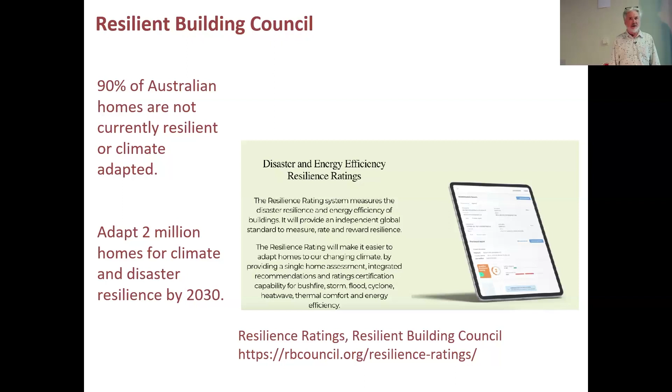So resilient homes can reduce inconvenience. That's the first step. Oh, there's a blackout. Oh, my fridge is still running. Isn't that nice? That's more than just nice. It means your food's not going off. So that's reducing wastage, and that's a sustainability plus. They also save money in the long term, and to an increasing, though still small, trend, reducing insurance premiums.

There is yet more work to be done to enable insurers to understand what a resilient home is, so that they will say, okay, we will reduce your premium because you're much less likely to be damaged by whatever event you're preparing your resilience against. It also means the home is more versatile in the long term and you can recover more quickly from extreme events.

So resilience is more than just surviving the extremes. It's taking them in our stride.

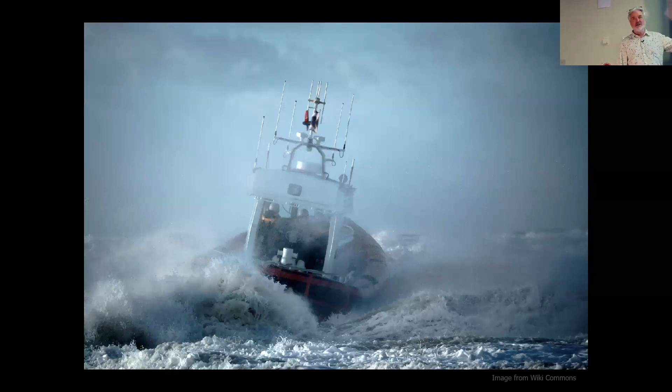I'd beach it ashore and I'd be eating the fish and chips and having a wonderful time. But the reality is that my boat would struggle in conditions like this, which happen regularly in the Tasman. It would need to actually be resilient enough to cope with that, and this would overcome it completely.

So life isn't always like this. We need to be able to cope with that. So when we're dealing with our houses, we have to make them healthy and comfortable. They have to be durable, and durable without lots of maintenance input. So that's one of the key things as well.

Because I don't know anybody who enjoys doing maintenance on their houses - maybe they're out there somewhere, I don't know. They need to be energy efficient, because that reduces the demand on your energy side.

Use low embodied carbon - it's not such a direct input into the resilience, but it's just a really good thing to do. And therefore, they need to draw on passive design elements to get that kind of ability to take things in their stride. Affordable utilities and bills, because part of resilience is that you might find external forces...

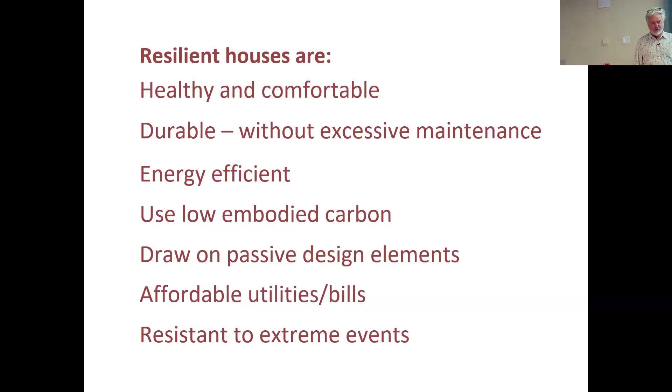Raise bills for whatever reason significantly, coincide with perhaps your inability to pay for them because your income might be hit by some event or other. So the better you can look after your income, that's great - that can be out of your control. But if you can bring your utility bills down, that increases your economic resilience and resilience to extreme events.

Obviously, so what are they? Heat waves, cold snaps, bushfires, floods, power outages, and mains water outages. If we were in other parts of the world, on that list I would have to put earthquakes. But at least in this part of Australia, earthquakes are very infrequent, and they're usually very mild when they happen.

So what can we do to actually respond to some of those things? Building design and specification obviously has a big impact on our response to heat waves and cold snaps, likewise to bushfires and floods. But floods are also affected by town planning. So if you're building in a floodplain, should we be building in a floodplain, I guess is the question we need to ask.

So there are some things there that are outside of our control. If you're already living in a floodplain, then there are things we definitely need to do that elevate that aspect of resilience dramatically. And then mains water and power outages, that's about building systems and how we set those up.

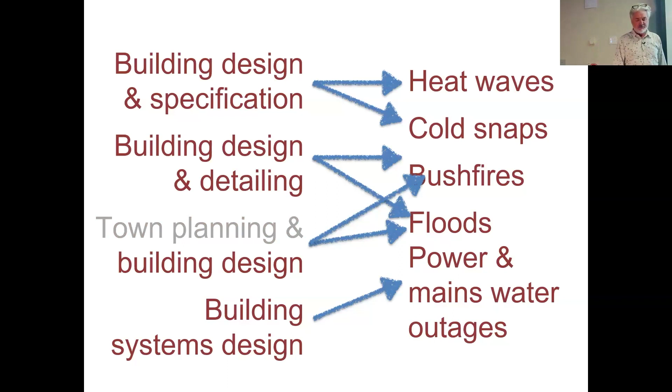So the one thing that we probably can't talk about and do anything about is the town planning issue right here and now. We can certainly support governments that say don't build on floodplains, but let's move on to what we can talk about. So in terms of retrofitting passive design - yes, you can retrofit passive design to uplift whatever potential a building has.

If it's a new build, obviously a blank sheet of paper, there's no excuse for not getting it absolutely right. But we can always do things to existing buildings to improve their thermal comfort.

Active design, so that's about your appliances and energy systems and so on in the autonomous systems. And we have, at Renew, we've been working on the Getting Off Gas Toolkit, which is incredibly useful and needs to get out there into the wider world big time.

So let's have a look at these extreme events and what we can do about them. Heat waves and cold snaps, I'm going to run them together because whatever you do generally to improve the thermal comfort of your building and the thermal performance will work if it's done with passive design principles. It will work for both.

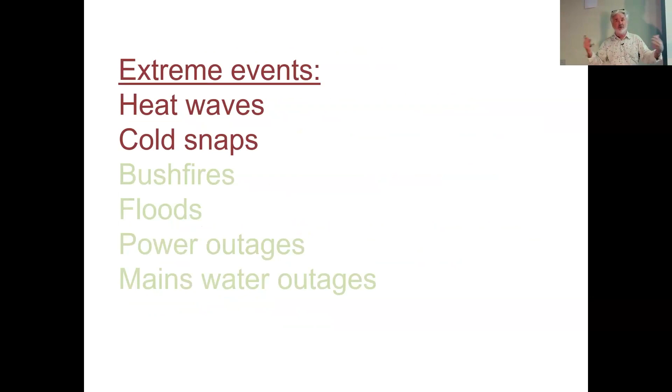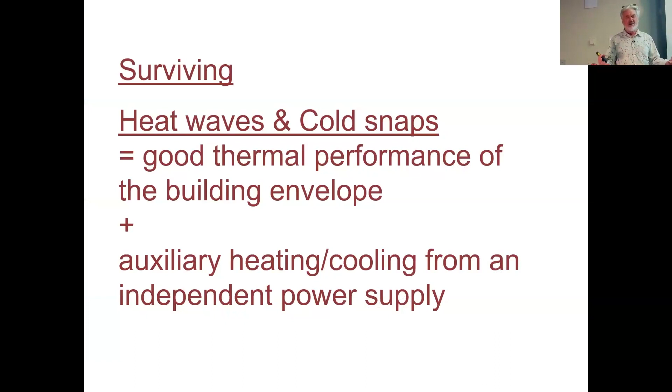So surviving heat waves and cold snaps, it's good thermal performance of the building envelope plus some auxiliary heating and cooling systems that have an independent power supply.

So if we're looking at thermal performance, passive design, look, I'm semi-retired, I don't like that word, I'm a building designer who's had a change of job description because now Renew keeps me and Graham really, really busy, so a little bit of work, a lot of Renew, it's all a big party, we love it.

However, I'm not an educator, okay? Yes, I've done a lot of training with the industry, but I'm not a trained educator. People who are tell me that if you want people to remember something, give them 5 points because there's 5 fingers. Now, that seems a bit simplistic to me, but I'll take their word for it.

The problem is that passive design doesn't properly fit into 5. I know there are people who theorise it this way, but I don't agree. So we need to basically grow a 6th finger, if you like, to help us remember.

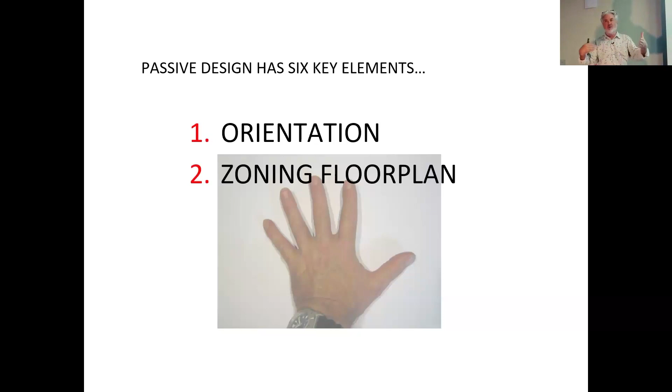So first one is orientation. Which way does the building face? That's all about the topography and your locality and so on. Number 2 is about zoning of the floor plan, not the zoning the building sits in terms of council zoning, but being able to zone off or control areas within the building. So it's not just open plan gone mad.

Third one is thermal mass, so that's just a kind of a battery for warmth and coolth. Fourth one is shading, self-evident. Fifth one is insulation, and that is the whole building envelope, floor, walls, windows, roof, the lot. And then the 6th one is ventilation, the ability of the building to provide fresh air, but also breathe out when things are really hot.

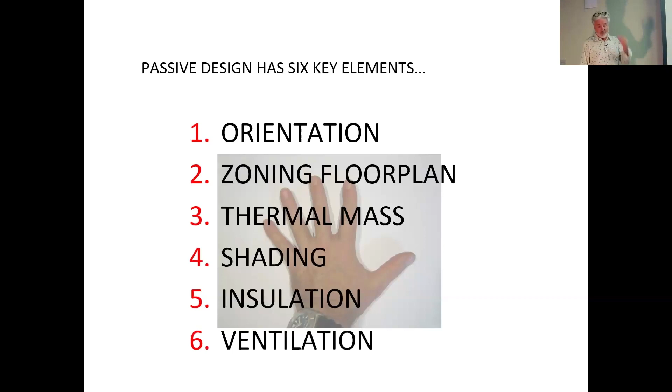And that's fine. It's basically got 2 main functions, and there's a couple of extra fingers there, and you'll see why in a minute. But passive heating by solar energy is the obvious thing for winter, and then passive cooling comes from excluding the solar gain. So bring the sun in winter, keep it out in summer with those other aspects together, and you can make it work. But it's always occurred to me that...

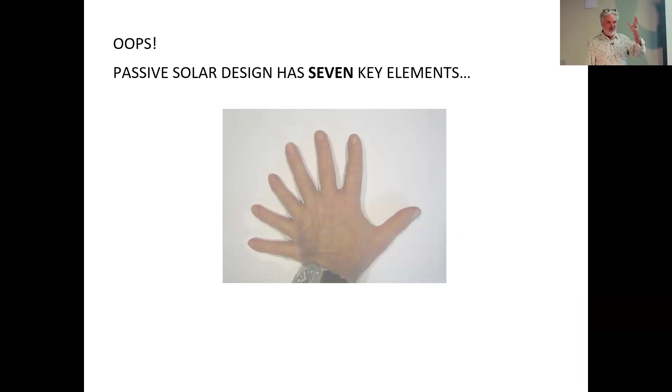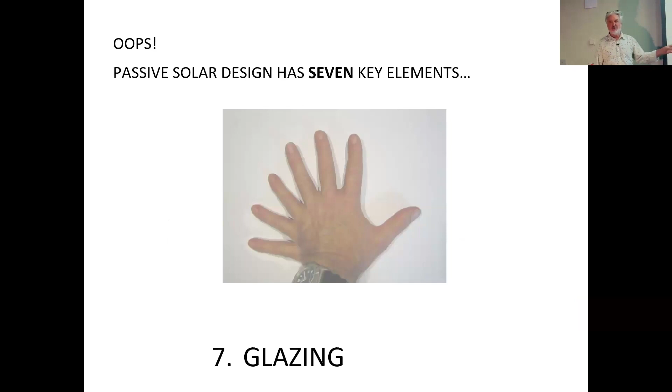There's something missing. And if you use the 6 key element theory, that's glazing. Now, it's a little bit different in character to the others in that it is a kind of specific building element, whereas the others are kind of more design principles. But when you put it with the others, you can see that with the exception of zoning of the floor plan, there is a direct relationship between the glazing and how each one of those other things works.

So the orientation, where's north? If you don't have glazing on the north, it doesn't matter, you've wasted your time. Insulation, glazing forms part of the necessary insulation barrier to get control of heat flows, etc.

So we'll go through these in detail. Now, I've put a lot of low-grade technical slides. They're not scary technical, but they're not just words and pictures, a lot of diagrams into this presentation. I'm not going to talk to every one of them because we will be here all night, but they're all in a PDF and it will be available for download on the way through.

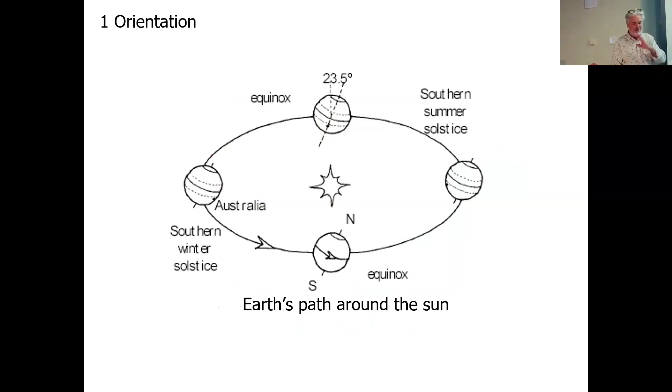So fundamentally, you know, orientation, we know that the Earth has a tilted axis, and as it goes around the sun, that's what gives us the seasons.

Bit of a relationship with the moon going on there as well, and that's what over 3.4 billion years has created life on Earth as we know it. And so we have the low angle winter sun, high angle summer sun. We can use fixed shading or active shading to keep that out or bring it in when we want it.

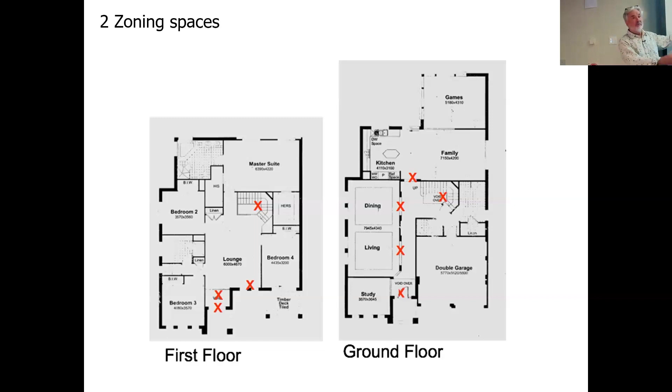Mad, open plan, gone mad. And this is then about zoning between levels, that you might have a really good plan that enables you to close it off, but there are also times when you might want to open it so you get stack ventilation going through. So it's about control.

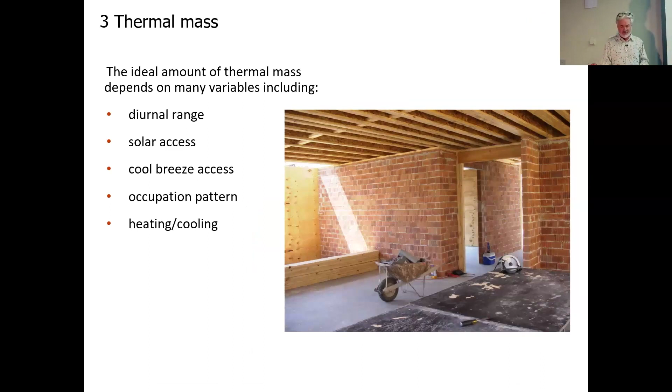Thermal mass, as I said, it's this warmth and coolth battery. We can do hybrid buildings that have a lot of thermal mass on the inside. Brick veneer is a hybrid construction, but the thermal mass is all in the wrong place. It's all outside, subject to the outside elements, and then we have to insulate against it. So reverse brick veneer is a much smarter thing to do. It's never taken off.

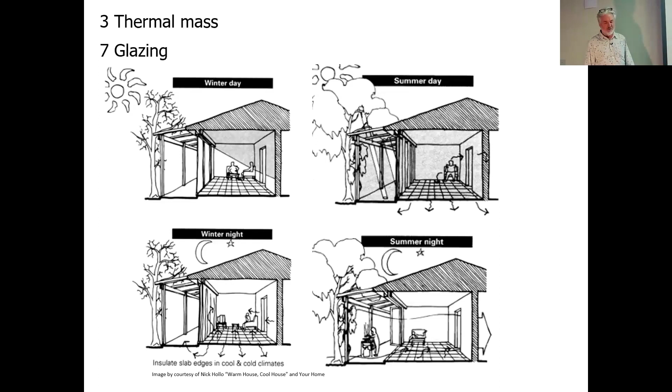So when it comes to shading, the fixed elements are things like the eaves, awnings, even fences, external blinds and trellises, and they can be trees and vines. Some of those things you would have no control over because they'll either be beautiful and you don't want to chop a tree down, or they're on the neighbour's side or whatever it might be. But basically, it's north-facing facades that need to accentuate that change in the seasons. East and west, it's just about keeping the sun out pretty much the whole year.

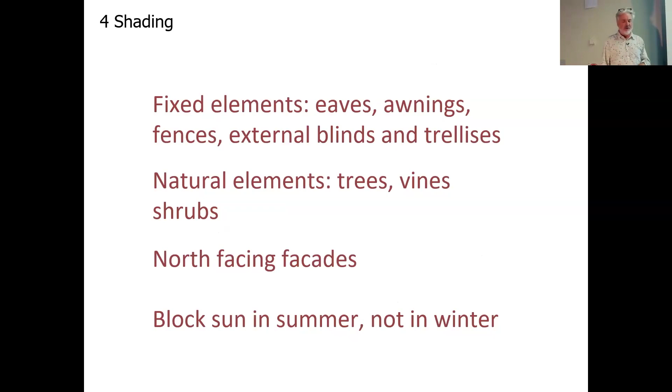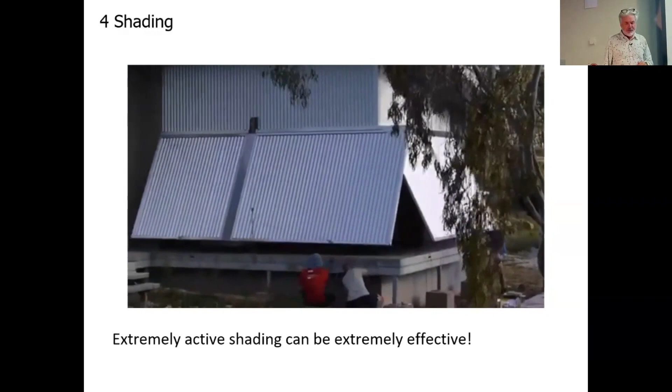And this is a little movie about active shading. Now these are hybrid, so they're a bushfire shutter as well as big shade shutters. And I know I'm not going to get any prizes for the cinematography on this, but I was on top of an 8-foot wobbly stepladder. So it's a technique I don't think Hollywood's going to pick up on.

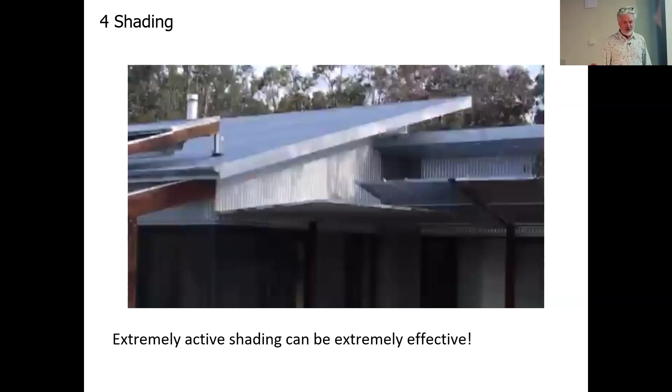But you can see from that it gives you lots of control over where you get the shading. Each awning is individually controlled just on winches. And when they're down, you get the bushfire shading as well, bushfire protection. And then you can have these awnings, if you're not in a bushfire zone, that are made of fabric that slide in and out. I love that contrast.

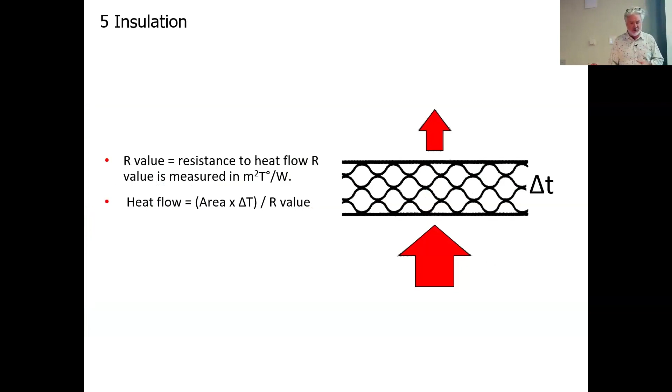So then it brings to the fifth element, which is the insulation. That's just about stopping heat from flowing through the non-glazing elements of the building. But this is where it comes back to my seventh element, that the glazing is part of the insulation.

Some years ago, and I don't know how many years ago it was, I wish I was part of the discussion when this happened, the powers that be decided that when we're talking about walls and roofs and floors and so on, we would talk about R values as a resistance to heat flow. And when it came to glass, we'd flip that and talk about conductivity.

No idea. The idea has no merit in my view. I mean, I've tried to understand why they would have made that decision. The only thing I can come up with is that if you talk about R value in glazing, you're talking about really small numbers—well, single glaze anyway—really small numbers, and that made them look bad. So that's the only thing I can come up with as to why they went that way.

Thankfully, arithmetically, they're just the inverse of each other. So if you look at the U value of a window, U being the symbol for conductivity, just flip it: 1 over U gives you the R value. That's why when you compare it with say an R6 or R5 batt in the ceiling, and then you get a piece of glass and it's 0.2 maybe, you realise just how bad glass is.

And this is where the rubber meets the road. That 10 square metres of an insulated brick veneer wall compared to an uninsulated single glazed window is 10 times more powerful as a piece of insulation. And that's just brick veneer, which isn't very special.

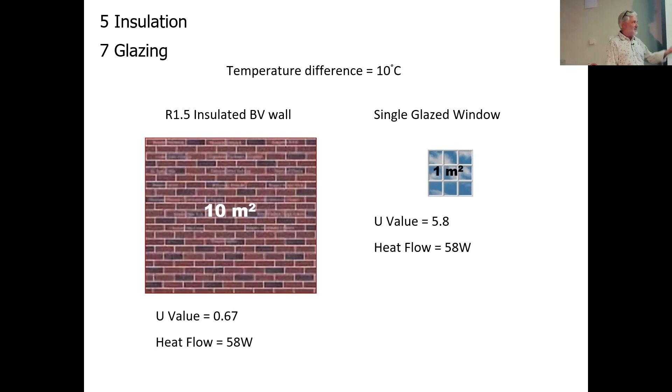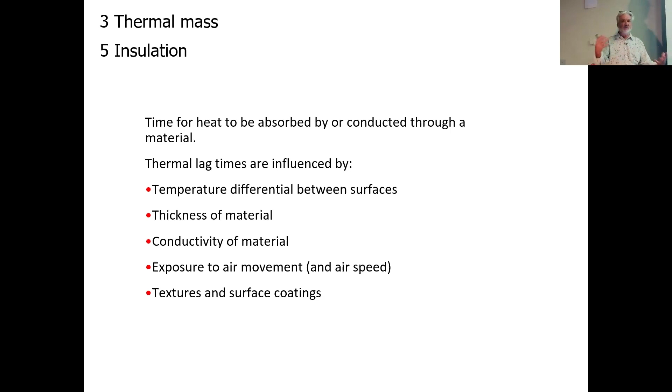So then when it comes to thermal mass and insulation, this is about lag time and the ability to absorb and redistribute thermal energy. The free solar heating has got to get into the material, whether it's bricks on a wall, a concrete floor, or a phase change medium behind a plasterboard wall if you're doing something a bit interesting. It absorbs that energy, stores it, and then when the ambient temperature around it drops, it re-radiates it.

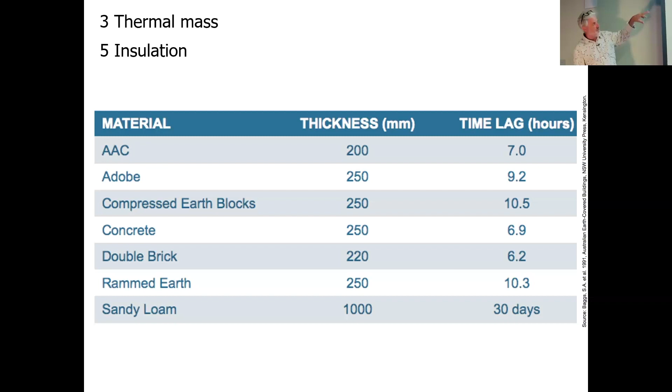And this is just some of the time lags per thickness of different materials, so I'm not going to dwell on that.

This one is really interesting as well. Some years ago, Newcastle Uni did some research. They built 7 little buildings, identical in plan size and roof shape, but with different materials and constructions to see how they all worked. What they discovered was that roofing material is less important than colour, and colour is less important than insulation.

That kind of challenged a few of us who thought you've got to have metal roofs and they've got to be light colour. Yes, they work best at blocking heat, but the big thing was just having insulation underneath. That was approximately 12 times more effective than worrying about roof colour.

Now, Think Brick, which is the brick manufacturers association, have just thrown some money at the uni to upgrade - in fact it's been done. All of those buildings have now been upgraded to the National Construction Code 7-star, which is the current standard.

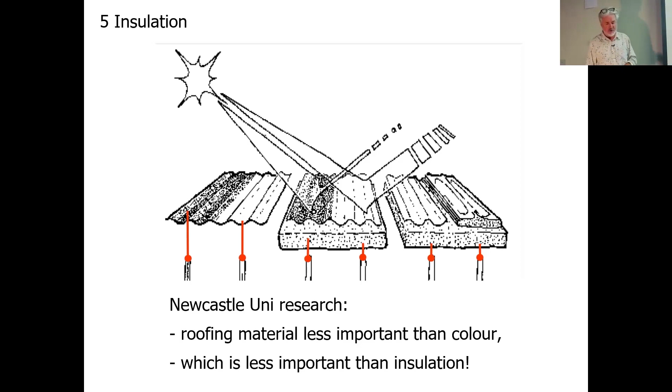Renew fought long and hard, and our policy manager, Rob McLeod, rounded up 105 organisations to, at last, after years of obfuscation by various other building industry bodies who shall remain nameless, finally become the loudest voice in the room and convince the government to take this big, bold step of going to 7-star, even though 7-star is still inadequate. But it's something. So now they're going to run a whole lot more tests on different things to see how it works in 7-star. That'll be interesting.

Insulation also has a direct effect on condensation. Oh, I forgot to start my timer - sorry about that, folks. But anyway, so yeah, condensation.

This is a big one because resilience - we're seeing a lot of press about people in the housing crisis being charged $800, well one in the Herald today or Guardian, $825 a week for a rat-infested, mouldy building, basically uninhabitable. That is not a resilient building. Mould is extremely hazardous to human health, so we need to get control of mould.

The insulation and the kind of insulation materials we use is critical for doing that. So if we look at the thermal profile of an uninsulated brick veneer wall, the dew point in this case is at 15 degrees, that's the point at which water vapour will condense into liquid and therefore induce mould.

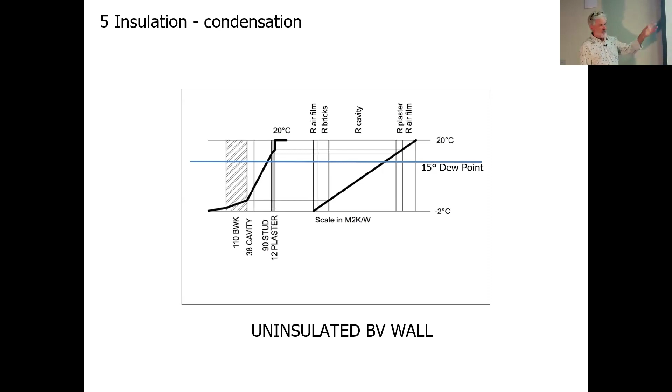There's a neat little calculator on the web called the dew point calculator, dpcalc.org. You can put in your temperature and humidity and it'll tell you what the dew point will be. So if you get the bom or listen to the weather forecast for temperature and relative humidity, stick it into this and it'll tell you the dew point. And it's surprisingly high.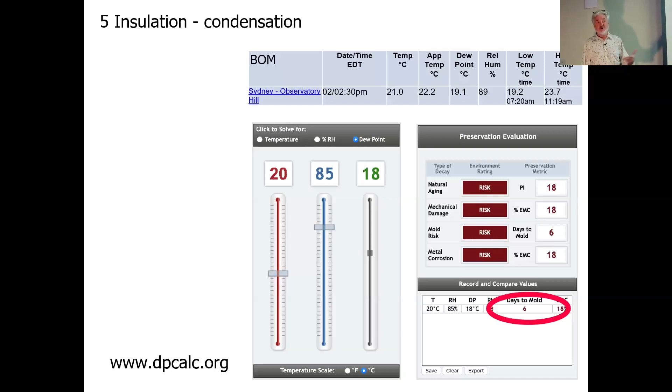That means condensation will form. In this case, 20 degrees, 85% humidity, this is like the day after an autumn rain event such as we've just had, the dew point's 18 degrees. It doesn't take much overnight to bring the temperature of building materials down below 18 degrees, and condensation will form on those materials.

Point 6, or key element 6, is about ventilation. In a lot of buildings, especially older ones, it's uncontrolled, and we need to get control of that. We want ventilation, but we want to know where and when it's happening and that it's happening in the right ways. Cross ventilation is important - that's a good floor plan. You can imagine any kind of bad floor plan that wouldn't allow it.

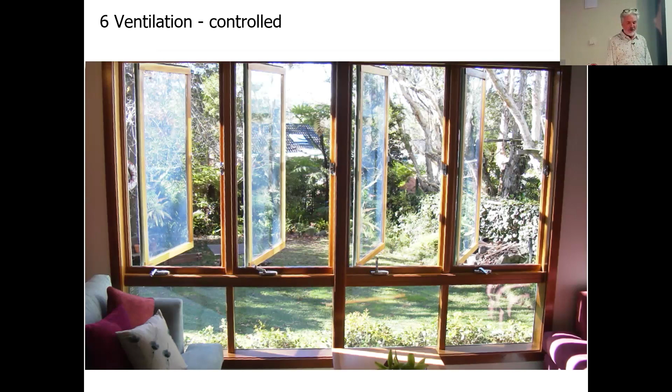Also think about the kind of windows we have that will encourage good breezes to come in. So these ones are all casement windows facing northeast, because that's where the sea breeze hits Sydney. Anything from the northwest, who wants it? So even if the windows are left open in a hot nor'wester, it's not going to scoop them in if they left home without closing the windows on a hot summer day.

Ceiling fans are also part of this because they're an incredibly powerful low energy tool for giving us thermal comfort in hot weather. And if you couple your ceiling fans with your air conditioning, you will get a fourfold increase in the efficacy. Isn't that a wonderful word? I love efficacy.

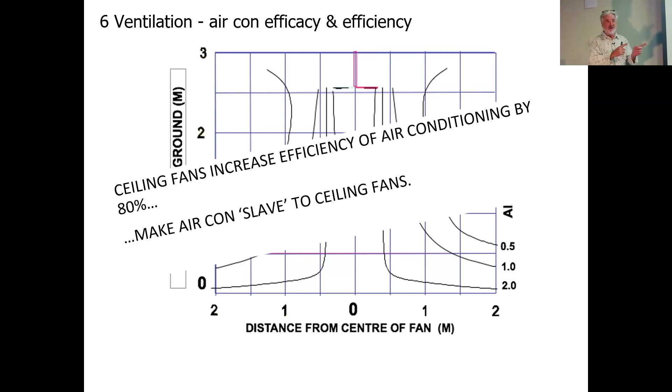So fourfold increase in the efficacy of your aircon. So if I was dictator instead of Dick Clarke, I would mandate that if you've got aircon, you've got to have ceiling fans and that they need to be coupled together so they're idiot-proof. So when we do new buildings, and sometimes it's possible in a retrofit but not always, we make the aircon slave to the ceiling fans. This is in a public building, so we needed explainers on the wall so that when people walked up to turn the aircon on, they understood why it wasn't working - because the ceiling fans weren't working. So it's a little explainer.

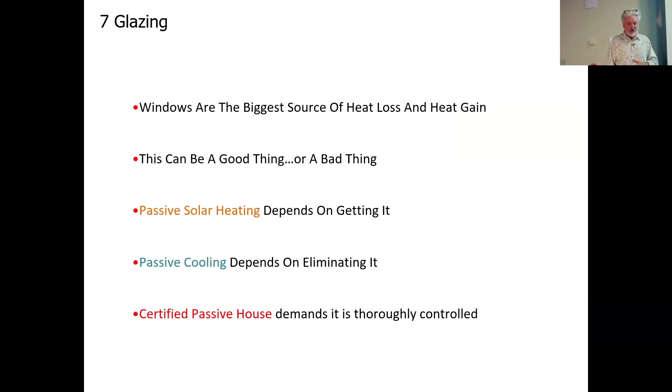So when we come to specifying and designing glass, don't stick your head in the sand and just go, oh, it's all too hard, or the blokes at Stegbar said X, Y, and Z or whatever. It's got to be appropriate. It's got to be thought through really well for it to work properly.

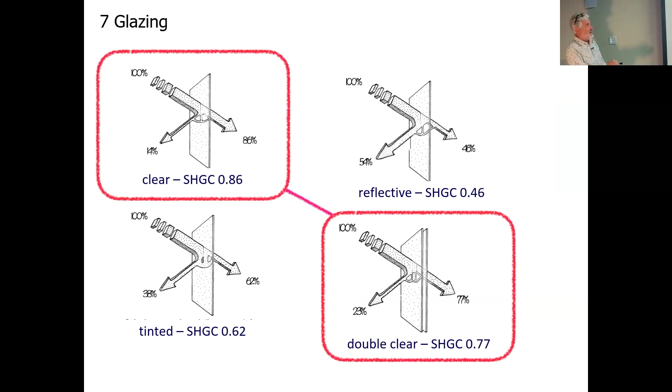Now I'm going to race through a bunch of slides here that'll all be in the PDF that show the kind of relationship between radiant heat and reflected heat. But just a quick pause on this one. What I'm looking at is the top left example here, which has a thing called clear SHGC 0.86.

There's a bit of a misconception still out there in the building industry that double glazing stops radiant heat. People think, oh, I don't need to worry about shading on the west because I've got double glazing. All you're going to do is make an even more powerful greenhouse.

The solar heat gain then is also affected. This is where, if you can't get shading on the west because you're too close to a boundary or whatever it might be, then you can use toned glass and other special glasses that will reduce the solar heat gain. But there's no substitute for double glazing for reducing conducted heat flows.

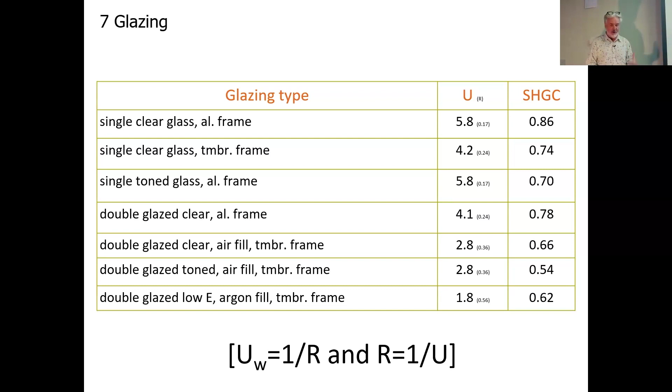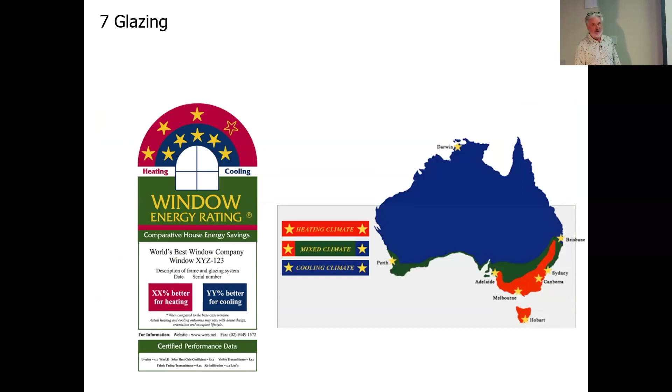I just want to sort of step back from the technicalities and think about strategy here for a second. The earlier you make decisions, the better value they are. The more you will get out of a decision if it's made early on, rather than trying to do a catch-up at the end. So it's always best to get things sorted out at concept stage than to have to retrofit them later down the track.

Now, that's all very well and good, but if you've got an existing building, you're already halfway through that process, and it is what it is.

It's still worth renovating buildings. I would never subscribe to the view that all old buildings should be knocked down and start again. No. Most older buildings have got a lot to offer in terms of the materials are already paid for, they're already there. The carbon that they've emitted in manufacture has been dealt with. And quite often they've got great character and there are lovely things about them that you want to keep. So it's actually quite, I think, relatively easy to improve the thermal performance of older buildings without trashing them.

Graham mentioned the Your Home manual before. I do feel like it's a bit of a baby of mine, because I was at the very first, 'is this a good idea' meeting that was held by the Australian Greenhouse Office back in 2000 and something, 1 or 2 maybe. And now we're on edition 6. So that's always a great reference source.

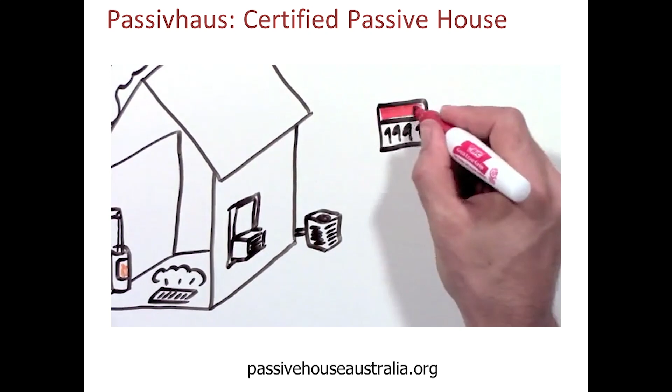Does your house have a heater in the basement or maybe a fireplace? Probably also a central air conditioner or maybe a window unit. Did you ever wonder if it was necessary? In 1991, a physicist in Germany, Dr. Feist, built the first passive house. Here's what he did.

1. Proper insulation. It's just like wearing the right winter jacket, it also doesn't need a heater. 2. No air leakages. There should be no holes, small or large, to let hot air out of the house. 3. No thermal bridges. A thermal bridge is like a road for heating energy in which warmth can travel right through your walls. As a matter of fact, most of our houses have thermal highways in our walls where heat can easily travel to the outside.

Plus, the house needs proper windows, most of the time with triple pane glass. It needs to be oriented properly so the sun can heat it in the winter and shade is provided in the summer. And it uses an HRV, a device that provides the inside with fresh air without letting the heat out. Add all these things up, and it turns out your house doesn't need a heater or air conditioner.

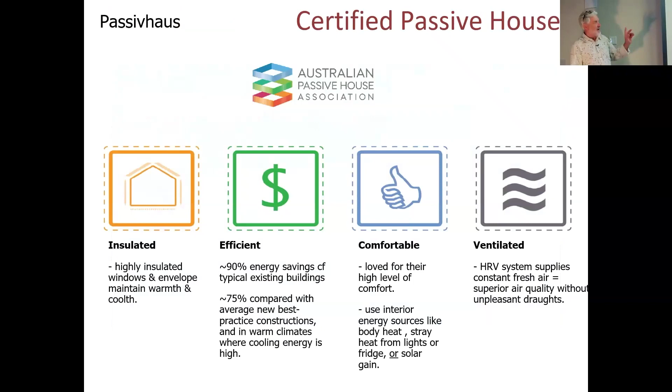So where does the heat come from? A passive house needs 90% less energy, and that can easily be supplied by your body heat, the sun, your appliances, light bulbs, and even your TV. This saves you a lot of money on your heating bill and helps preserve the environment. Did we make it in 90 seconds? You bet we did. So: insulated, efficient, comfortable, ventilated.

The ventilation bit is quite critical, but basically the passive house standard is verifiable because we do a blower door test to check the air leakage, and that's a proxy for how well everything else has been built. If it fails, you go around and fix things until it passes. To be certified, it has to have less than 0.6 air changes per hour at 50 pascals, which is like a 15-kilometre-an-hour breeze.

The critical thing in terms of resilience for us is really about the heat recovery ventilation system being able to be filtered, because it can take out every perceptible bit of bushfire smoke. They can filter down to PM 2.5.

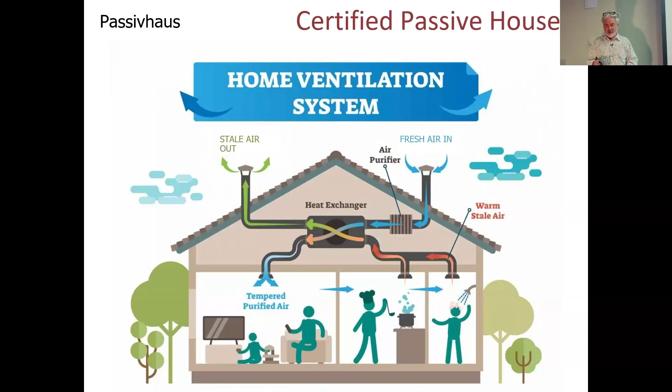Somebody in Canberra did this during a bushfire event. Outside, visibility was like 200 to 300 metres in the smoke, and they were measuring their indoor air quality particulate. He said he couldn't smell smoke, though it still registered a very small amount, about 3.5% of what was outside. That's an extraordinary result, and bushfire smoke is not good for you. No smoke is really good for you.

The bright thing going on here is you don't have to build a new house. You can use what they have as a kind of renovation hit list called EnerPHit. You do as many things as you practically can on that list, and you can still get a kind of certification for it. It's just common sense stuff, like what we looked at, but done without compromise, and that gives a very good result. So once again, it's this point where the decision you make gets you the best value out of it.

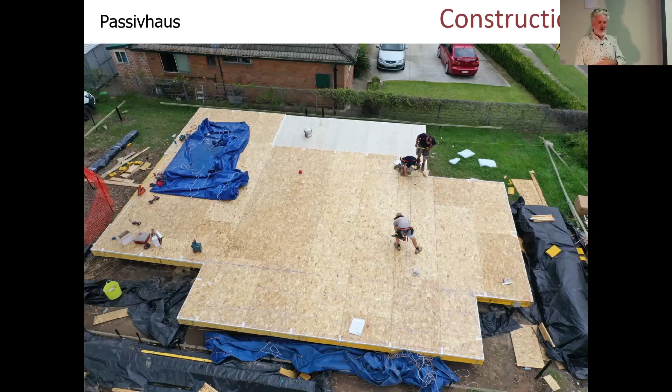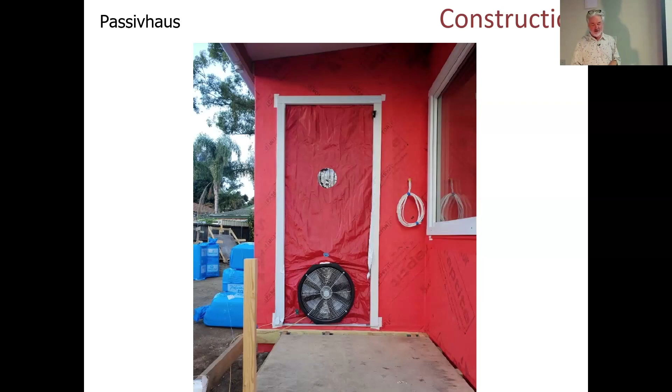So what does a passive house look like? These are a few photos of the Thornleigh house, which was Sydney's first and Australia's second, being constructed. At this point you'd say, oh yeah, this looks like a house. Then the airtight wrap went on - that's airtight, the ceiling panels are sealed to it, so the ceiling panels are also airtight, floors airtight. Windows and doors go in, taped to it, so they become airtight. Then all of the insulation goes in, and the blower door test is done. Once it passes, you put the skin on, services in, internal fix out, and voila, you have a finished passive house.

What do they look like? They can look like anything. Passive house is not a determinant of style or design in that sense - they can look like anything you want.

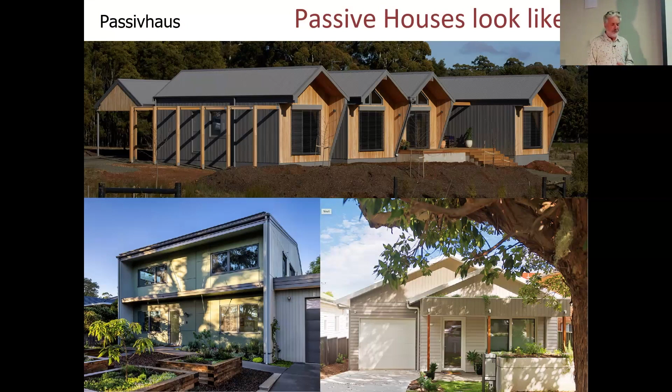For extreme heat, PV can run air conditioning during the day at no cost, because the solar output period in the peak of the day is aligned with your need for air conditioning. But if that air conditioning needs to run into the evening to keep you comfortable, and there's no mains power, and you have a PV system disconnected from the grid - it's worth pointing out the standard PV system is slave to the grid, so if the grid goes down, your PV system shuts down as well. That's so you don't become a power island.

So what was his name that did the song about the linesman? American country singer, Glen Campbell. What was the name of the song? The Wichita Lineman, that's right. So when the Wichita lineman comes around, he doesn't get zapped, because then they never would have been able to write the song. So that's why it shuts down.

But you can have it set up so that it disconnects you from the grid but still allows your internal systems to run. That makes most sense because you've got a PV system you paid thousands of dollars for and you can't use it - that makes no sense. So a battery may well make sense to allow you to offset your demand from your production period.

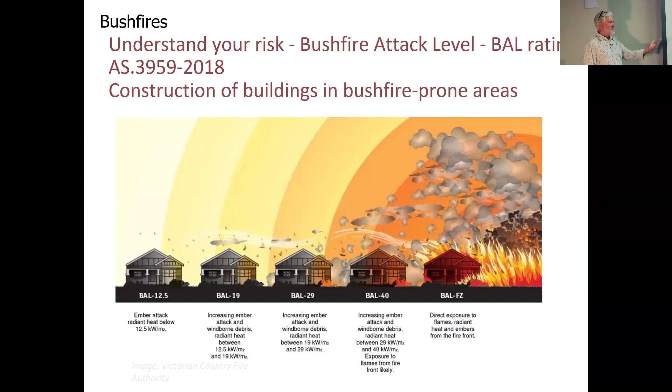Okay, bushfires. First thing to work out is what your BAL rating is. Is anyone here in a bushfire zone? No one in the room? There'll probably be people on the Zoom who are. You need to understand what your bushfire attack level, the BAL rating, is.

Basically, if you're in BAL low, that means do nothing. BAL 12.5, you've got to survive ember showers, low level radiant heat, and so the external materials have to be resistant to ignition, but hardwood's okay. And you can't have gaps anywhere in the building perimeter of more than 3 millimetres. They have to be less than 3.

The next level up is BAL 19. It's heavier ember showers, radiant heat exposure up to 19 kilowatts per square metre at 50 metres. So that's what the 19 signifies. It's got to be able to survive flying, burning debris, and the external materials have to be resistant to ignition. So some hardwoods are okay.

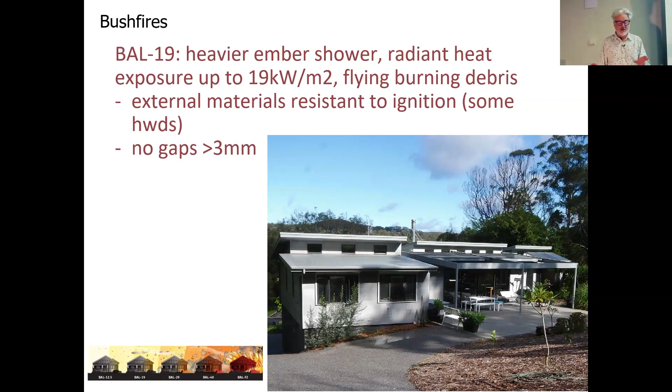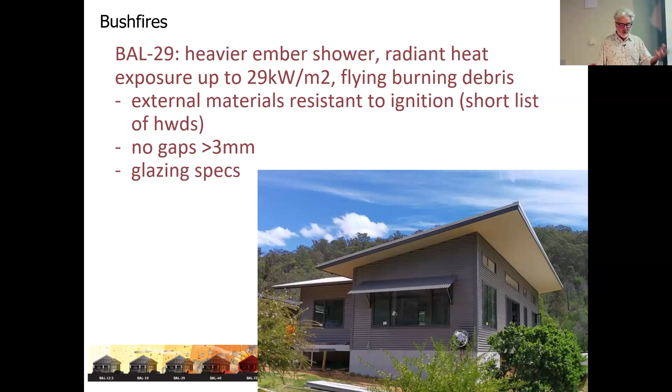Once again, no gaps. BAL 29, next level up, heavier ember showers again, radiant heat to 29 kilowatts per square metre, more flying debris, etc. So similar to 19. Then BAL 40 is a bit of a step up. So even heavier ember attack, radiant heat exposure to 40 kilowatts, flying, burning debris, possible flame contact. So no external timber, no gaps more than 3 millimetres, and much tougher glazing specifications, including rubber seals and so on, have to be capable of surviving that.

And then BAL flame zone, this is the one that's really quite problematic in many instances. It assumes a deluge of embers, radiant heat beyond 40 kilowatts, flying debris, flame contact for up to 10 minutes plus. So obviously no external timber, nothing combustible outside, no gaps, and shutters on windows unless they are FZ rated windows, and they do exist, but they're very expensive. Shutters aren't cheap either, and the shutters have to pass certain tests and so on. So flame zone is difficult.

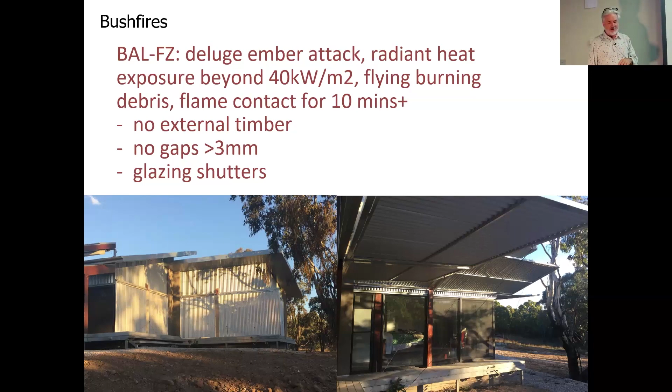And once again, just a reminder of that system there we used. Now, a reminder again about the usefulness of HRVs. So even if you're not building a passive house, if you get your building airtight, and this is no matter what bushfire rating you've got, if you get your building airtight and you fit an HRV that's got the filtering capacity, you can change filter cartridges. So you can pull a cartridge right out and run unfiltered if you've got nice clean air most of the time.

But if you run a PM10 filter, which is what most people seem to do, when you're in a heavy bushfire smoke situation, you can pull that cartridge out, stick in a PM2.5, and get almost literally clean air. And then when the bushfire's gone, you can pull your PM2.5 out, put your 10 back, so that you're not using expensive filters all the time.

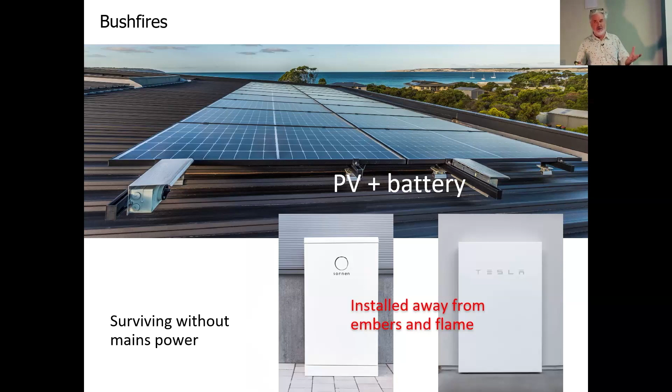And the PV and battery, just to make sure that the batteries are installed away from embers and flame, obviously, because while they won't explode of their own accord, you're listening, YouTube, they will suffer and could explode or catch fire if they're exposed to direct flame from an outside source.

So when it comes to flood resilience, I guess, look, the things we need to look at are wet proofing the building, making things able to be dried, thinking about elevation, landscaping, how does that direct water. And then the design guides that are published are really useful as well.

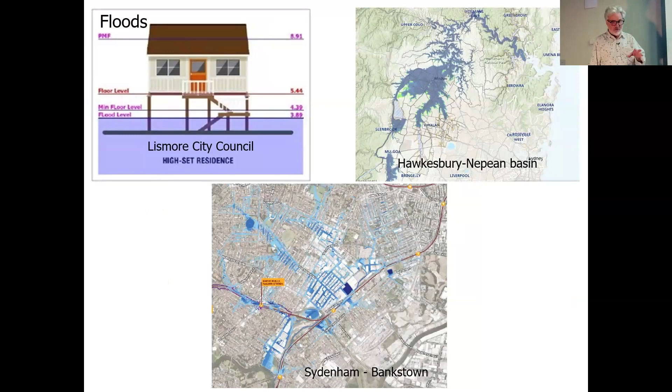So basically, the authorities know these floods are going to happen, and they have mapped exactly where and how they're going to impact. So there's another useful thing that the government is currently running as a voluntary kind of house raising scheme. I don't think it's going to affect anyone in Sydney terribly much, but they're certainly pushing it up on the North Coast.

But what we can, if you know you've got flood issues, you can, even by retrofit, dry proof the structure by getting the absorbent materials up above the flood level. Now, flood levels are published as the PMF, probable maximum flood level, which is quite high, and you'd normally then have a margin of safety above that again, and that is all well above where people will tell you it's flooded over X number of years, and that's because anticipating climate change and the severity of events getting worse, so there's a margin of future proofing.

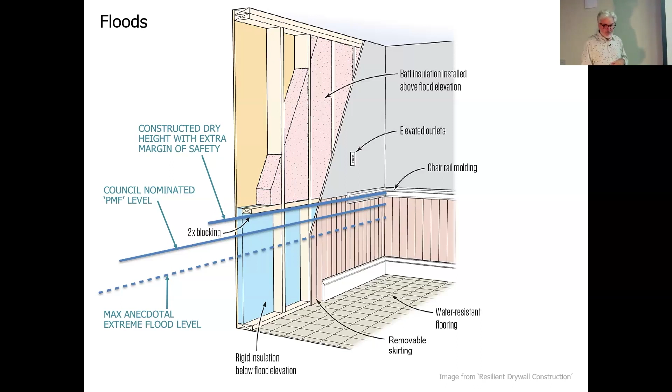Another way of doing it is to make the house float, where you basically build it like a marina pontoon with columns that are in the marina industry called dolphins. I have no idea why. And so this is a big reinforced concrete flotation base. And when the floodwaters come, it rises up around the dolphins. The dolphins keep it in place. And you swap your car space for your dinghy, your tinny space.

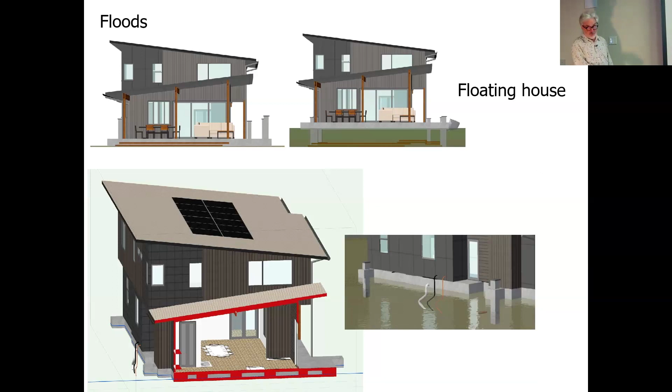Yes, it's entirely practical and possible. This is some modelling we did about 10 years ago. You can have flexible service connections, and that's all off-the-shelf technology and fittings. That's easy to do.

Lake Macquarie City Council have actually written it into their DCP. Electrical equipment, especially expensive high voltage equipment, should be well above flood level.

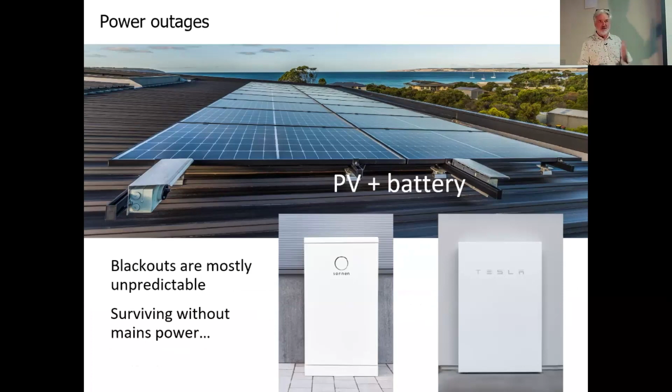Now, power outages - this one's kind of a no-brainer. PV, battery, away we go, as long as it's the isolated type, away from the grid, to disconnect you from the grid.

So mains water - it really gets back to the whole water sustainability thing. In Sydney at least, it's been a while since we've had a drought, but people in other parts of the country have been going through some pretty dry times. And when they're enjoying wetter years, we've been in drought. So we know these things are cyclical.

We know they're going to come again. We're pretty sure they're going to get worse. Whether they get longer, we don't know. Whether they get more severe is almost certain.

The severity of a drought is measured both in its duration relative to the amount of rainfall, but also just the amount of rainfall. If we had no rain for 6 months, we're in drought. But we could have a drought that's 2 years long with just below average rainfall, and we're still in drought. So it's kind of a dynamic thing.

The other thing that can happen, of course, is that water mains burst without warning - they never know when that's going to happen. They'll also have scheduled maintenance, and while that's usually notified, it's still an inconvenience.

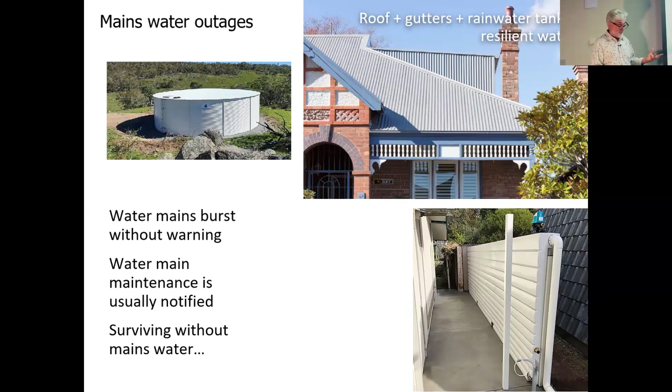So surviving without mains water - tanks and so on, gutters - you need a bit of rainfall in the first instance to make it happen. So rainwater safety is something to consider.

It's all about location - what's your local air quality? If you're on a main road or under a flight path, you're going to have airborne particulates coming down onto your roof. If you've got lots of overhanging trees, you're going to have leaves coming down onto your roof. Those things are not good for rainwater quality if you're going to use it for anything other than watering the garden or flushing a toilet.

So the first thing is to look at gutter filters to filter out the nuts and bolts as they fall, and then to look at a tank inlet filter.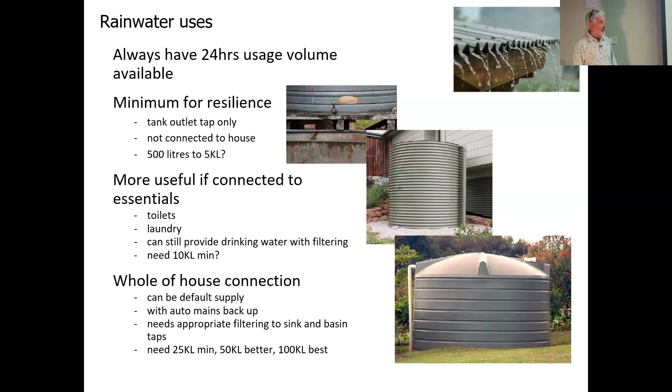In terms of tank size and so on, you can have an outdoor tank with a tap on it and put your kettle under it if you want - that would be a small tank. Depending on how much space you've got, you work up to bigger and bigger tanks. Those tanks are going to be constrained by space, by the connectability to existing buildings and so on. Lots of constraints, but I think it's always best to go for the most that you can possibly store and capture - as many downpipes as you can get into that tank, and make that tank as big as you practically can. That gives you the most reliable resilience.

Now, at this point, I've gone pretty quick. I'm guessing I'm probably right on about time, and it's probably time, therefore, to tackle the one that I really cannot resolve - I have no idea.

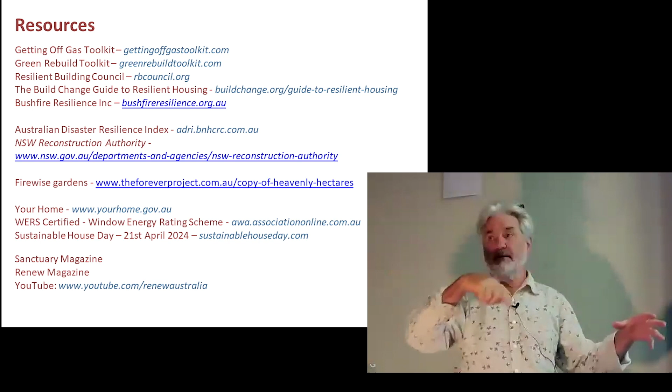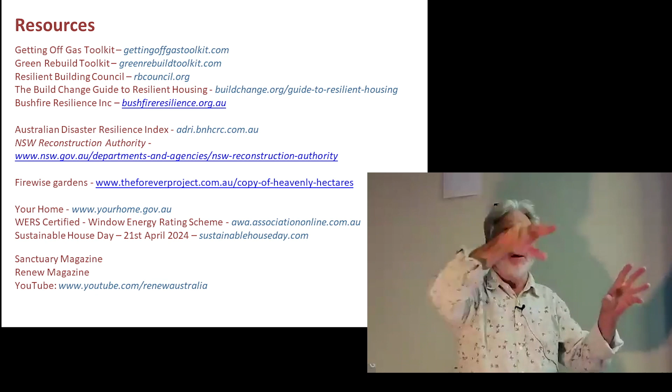Well, traditionally, makeup air should always equal whatever's being drawn out in the first place, so I'm with you on that one. It doesn't seem to make sense, and I'm assuming they're just working on the basis that most houses are leaky, but of course that leakage will be bringing in unfiltered, uncontrolled air. In terms of your HRV issue, yes, fitting a centralized system in a retrofit often just isn't practical, sadly. You can get wall-mounted units in pairs - so in a room like this, about 70-80 square meters, you'd have one in that corner and one in that corner, diagonally opposite, and that would give you the best approximation of moving the air through the whole space. And they talk to each other by Wi-Fi.

And so one's sucking while the other's blowing, and then after several minutes they reverse. They have a little ceramic heat bank in them that acts as a heat exchanger. It's an approximation, and they work reasonably well. They're certainly better than nothing, but you can't filter them down to anything even like PM10.

They've got a sponge filter, and it won't pull out smoke, probably wouldn't even pull out dust. And it wouldn't do any makeup air either, because what comes in goes out - that's right, not for your range hood. So it sounds like you almost need two makeup units to cope, which is also starting to sound a bit expensive.

So the option, I guess, would be when you're running the range hood and external conditions outside are adverse, don't.

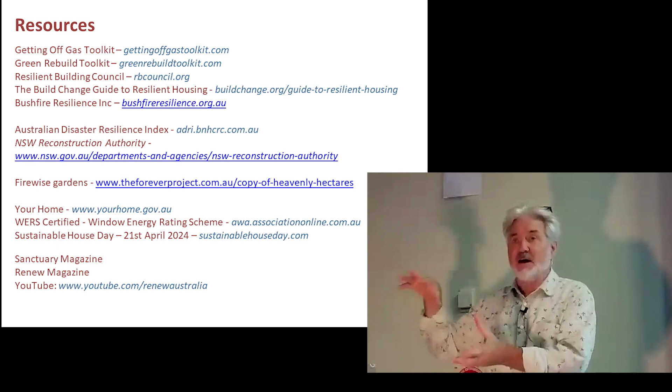So you can get a certified Passive House design, and when you run it through NatHERS, it'll come out at 6.5 star, and you go, gee, that's not real good. It's just because they're measuring different things in different ways.

So the 7 star thing, which Western Australia - where are you? I'm looking at you here - decided not to implement. Like, why? The cost of achieving 7 stars is very low compared to the benefit.

Is 7 stars adequate to achieve real resilience and sustainability? No, it's not. Excuse me.

But we were so frustrated with the recalcitrance of the couple of building industry associations who had been the loudest voice in the room and had been holding us back. Go back to the mid-90s, and New South Wales was the first jurisdiction to introduce minimum thermal performance standards at 3.5 stars.

And they cried the sky is going to fall - it didn't fall. They increased that to 4 stars - sky is going to fall, didn't fall. 5 stars, 6 stars - every step along the way they fought tooth and nail to hold these standards back. And it sat at 6 stars for years.

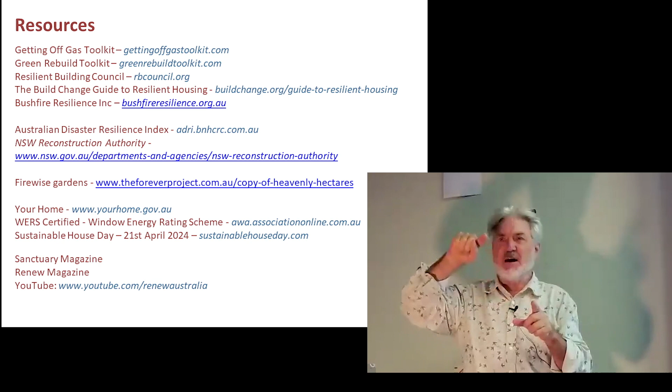So where we need to get to is probably 8.5 stars. At 8.5 stars, if you measure the thermal performance and heating and cooling energy used, as your star rating goes up, it's getting better and better and better. You get to about 8.5 stars and it starts to plateau off.

Law of diminishing returns - so you don't need to be 10 stars to achieve net zero. You can do it at 8.5 stars, no problem, 8 stars even, depending on the climate zone you're in. Then you throw on your PV and your battery and you've got a net zero building, a very, almost fully autonomous net zero building. So that's where we need to get to. The 7 stars is not there - that's a staging post at best.

There's a further question about cyclonic fixings and stormwater. Someone online commented that in far north Queensland and the NT, buildings are obviously built to cyclonic conditions, but now Brisbane's been hit with mini tornadoes and the buildings aren't coping. The standards for cyclonic fixings are based on a map, which may need to be reassessed as to what areas should have those higher standards.

And I didn't address your question about gutters, sorry, but that links straight into this. Some of the rainfall events we saw last weekend in the Illawarra, down the south coast of New South Wales, were something like what you'd see in a Cairns wet season, or maybe not quite as extreme as a Darwin cyclonic rainfall event. So those kinds of standards, the current standards, are probably not adequate.

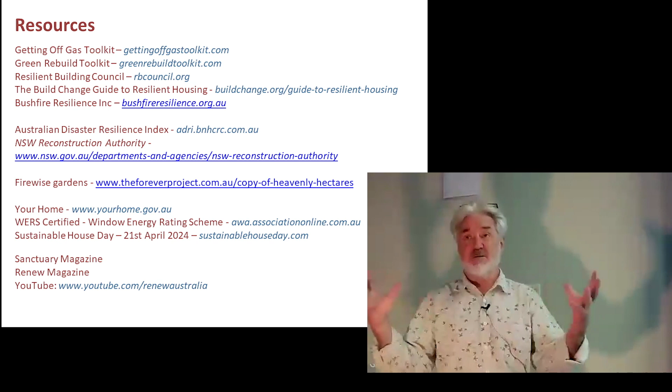That factors into what you're doing when you've got all that water off the roof - now what, where's it go? It goes into tanks, great. When the tanks are full and overflow, where does that go? Is the street infrastructure adequate, or do we need to do something? A lot of councils have on-site detention requirements now, where you've got to hold a certain amount back and release it slowly to compensate for the fact that we've got so many hard surfaces and roofs.

There are ways and means of designing your tankage to get best value out of it. Don't have a standalone OSD system, because all that does is give community benefit, no benefit directly to the homeowner. But if you incorporate that into your domestic storage tankage, you get that bit for free - you drop the top portion of your tank to fulfill the OSD function, and store the rest. So your tank's got to be a little bigger, but the capital cost is much lower than building something standalone.

Discussion of gutters - I remember being in Singapore where none of the houses had gutters, to prevent standing water, because all four strains of dengue fever are rife through Singapore. Dengue fever is now working its way down the eastern seaboard of Australia. Is tropical disease management coming into building standards?

No, it isn't. That's a good point though. A properly designed and built system obviously won't allow standing water, but there's a maintenance issue - if you surveyed houses more than 10 years old, certainly more than 20 years old, you'd find gutters that have sagged, a few things gone wrong, and there'd be standing water. Probably the difference between us and Singapore is our evaporation rates are much higher. In summer, in warmer conditions when dengue fever risk is highest, our evaporation rates are much higher. Singapore's constantly high humidity means their evaporation rates are significantly lower.

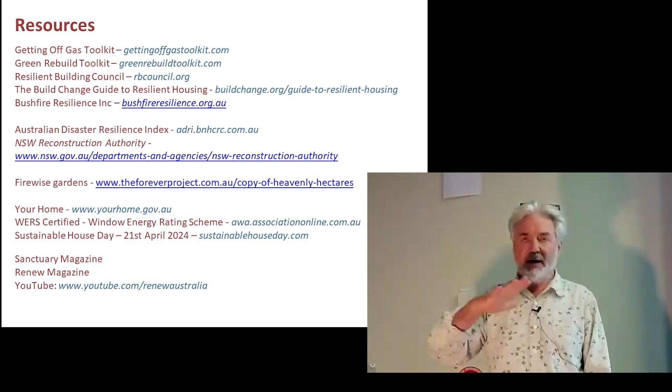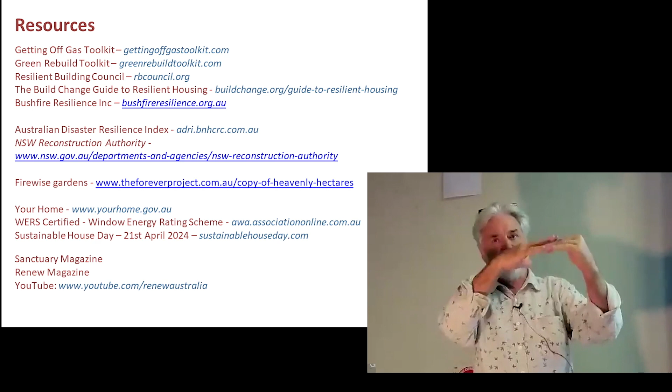But if it's just ember showers, the things to do would be to have gutters that are either extremely easy to keep clean, or that have a very effective metal gutter guard, leaf guard over them. And the best kind of leaf guard is one that doesn't kick up, because then it just contains leaves and sticks, and they break down. You get all this detritus in the gutter anyway, and you still have to clean that out. So the best ones are where they literally either tuck under the second course of tiles and go straight to the edge of the gutter on slope, or if it's a metal roof, they conform to the metal but then go straight to the gutter, so that as sticks and leaf litter fall down the roof, they tend to go straight off the edge. Now, that will usually involve dropping your gutters, so that's an expense.

I mean, it doesn't mean you necessarily need new gutters, but it's still something that has to happen, probably, with a trade on site. So that's the first thing.

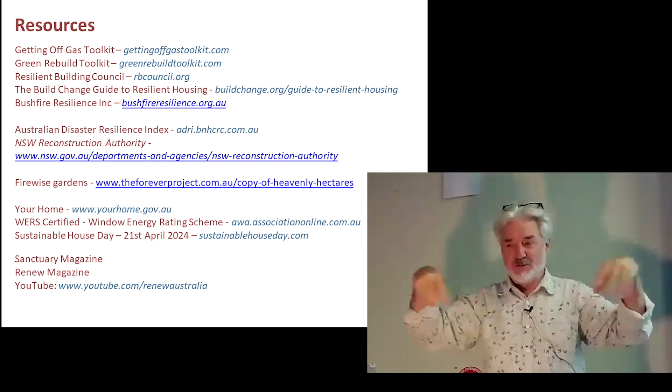And then to have some way of, in a bushfire event, filling those gutters full of water, which means that you have a little plug either at the top of a downpipe if you can get to it safely, or at the bottom of a downpipe if it's too high to do safely. And then you fill the gutters and downpipes with water so that as embers fall on your hopefully gap-free impervious roof, at least when they go down into the gutter, they're extinguished, because if they're not extinguished when it gets into the gutter, they can blow back up under the edge of your roofing and into the roof space, and then you've got real problems.

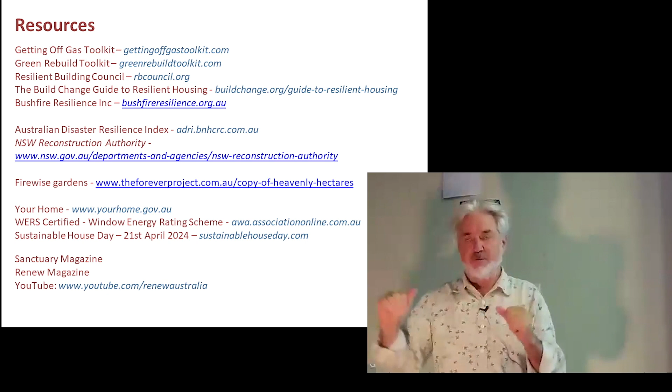Another thing that could be done is to just put an ember-proof seal on top of the fascia, which is usually a mineral fibre. It's like a rockwool insulation batt, but it's sort of in a strip, and because it's a little bit squishy, it'll conform to whatever your roof profile or roof tile profile is, and then have the roof put back down on top of those. That stops embers getting back up that way as well.

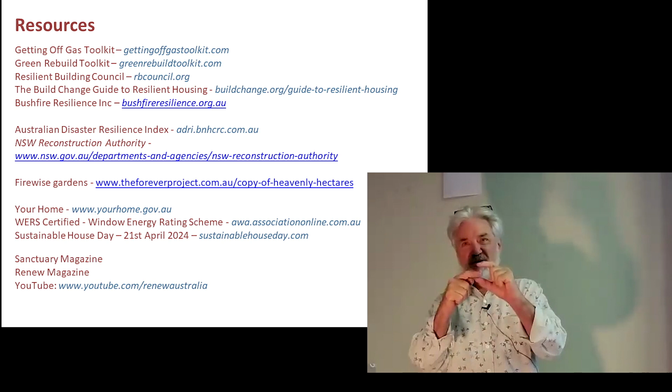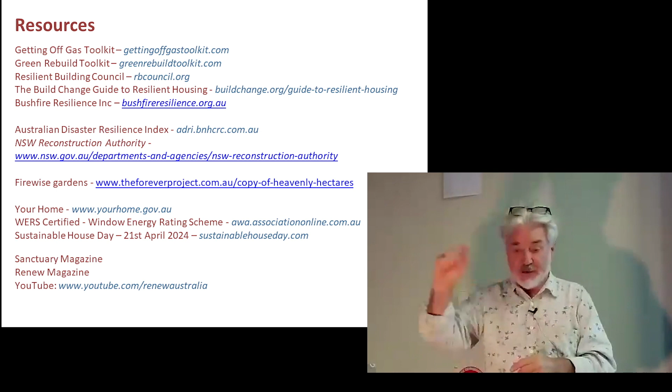It's still a good idea to have water in your gutters though, because typically your fascia will be timber, and there's often a little bit of fascia exposed between the top of the gutter and the roofing. Now, in a BAL-rated design that you're doing from scratch, that fascia would be metal, so it wouldn't be an issue, and you'd have the ember proofing. So in that kind of roof, you don't need to worry about filling the gutters because there's nothing there to burn - no combustible material and no gaps. But if it's a retrofit, you have to assume there's a bit of timber exposed above the back of the gutter.

So there's a question about fascia gutters - don't use a fascia gutter. A fascia gutter has a front face that's much higher than the back, and they're designed to completely obscure the line of sight to the roofing. They started back in the late 60s, became very popular in the 70s and probably early 80s. Not so much now, but yes, it's impossible to get a leaf guard that doesn't kick up at the end if you've got a fascia gutter.